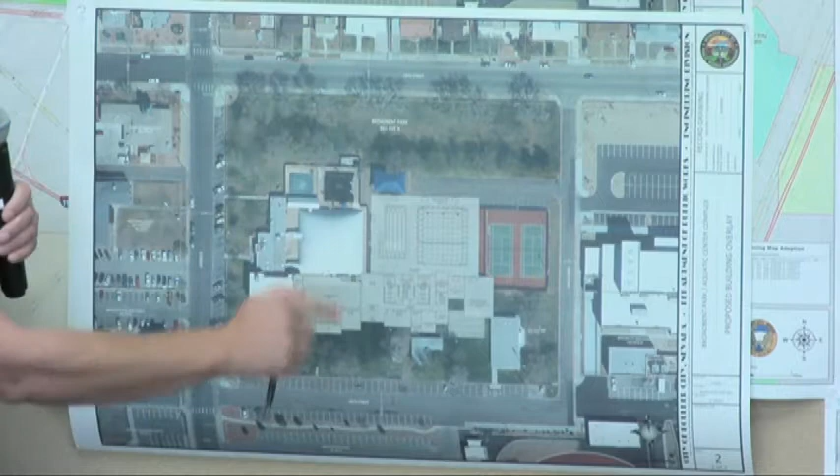All right, so the north is this way. And if we put doors, I'm thinking 2 on the south side, 2 on the north side. Then with the wind, we can open them up, because it's continually blowing. In the summer it's blowing this way, and in the winter it's blowing this way. If you go to Heritage, the air quality in there is really stagnant, you almost want to just stand outside, run in there, watch and come out. So this would help, especially when you're in there trying to breathe.

And the gated area, I was thinking if you put a gate, it could be part of that sun area for the parents, and I think it's a good idea. No, yeah, I see now. I was kind of putting it all together in my head, but I sometimes hate to assume that I know what's being said, only to later find out that I was assuming wrong. Yeah.

Any other questions or comments? A question I had is, when we look at what's commonly known as the Girl Scout building, do we know who owns that property? Is it the city? The property is owned by the city. However, in 1940, and I got a copy of the paper from the Boulder City News, the city made an agreement to let them use the property. The Girl Scouts built the building with volunteer help and operate the building on city property. Okay.

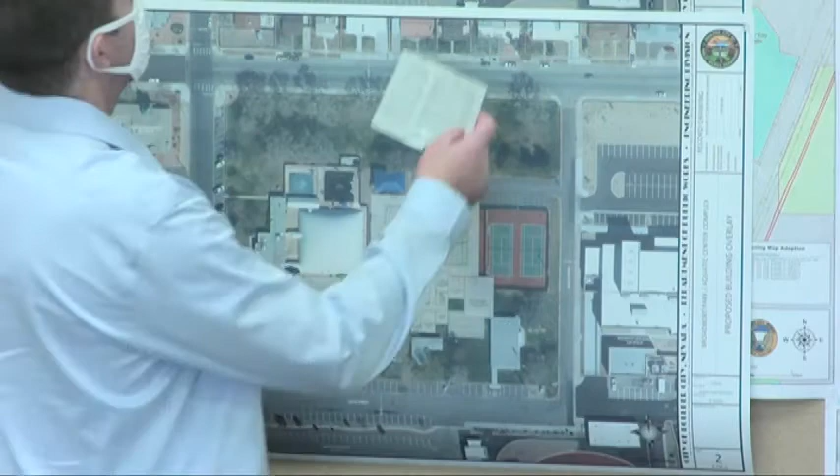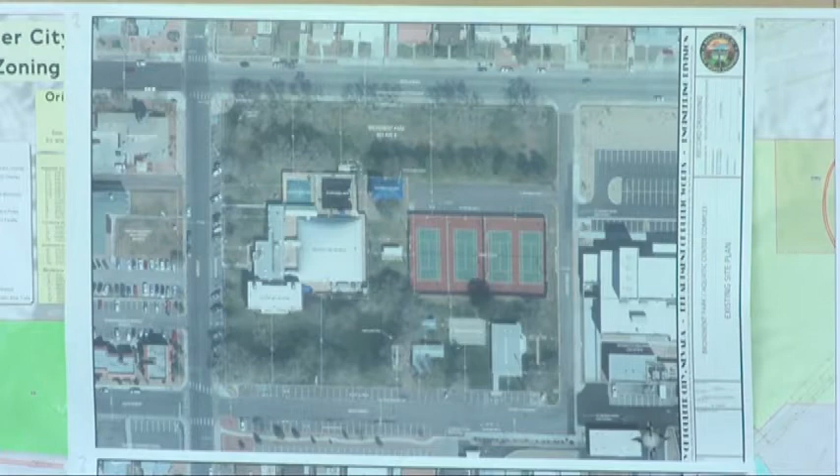Now, are you talking about... Your mic's not on. Sorry. You'll need your third hand for this. I'm not very good at multitasking. Are you talking... Yes, move that part of it.

The other thing, I realize we've got the 4 tennis courts there, and the way it's pictured right now, we lose 2 of those tennis courts. My idea is to try and preserve as much as we possibly can. What happens if we turn that pool, like that, and then slide it up? Now we're talking. Are we gonna try to retain the pool while we build the pool? Well, that was the initial discussion. If we don't, we were estimating, Mr. Luttrell, a minimum of 1 year, possibly longer, without a pool. I'm thinking at least 18 months, could be longer depending on construction.

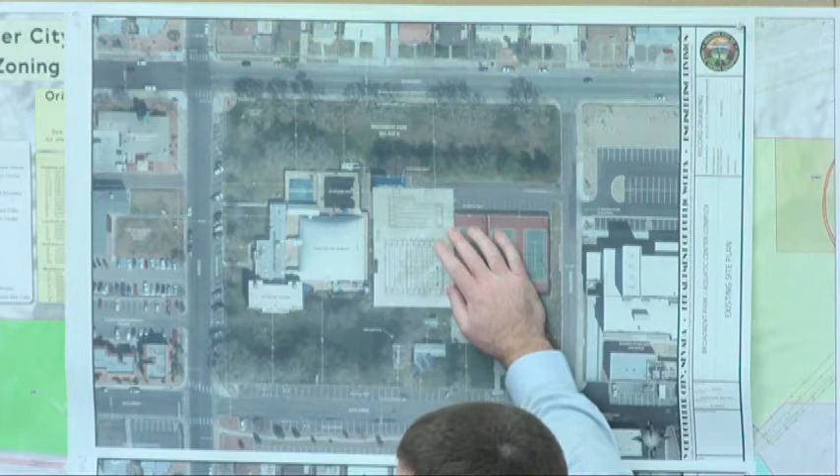What happens if you slide it up to the right over those old bathrooms there? Would we use the office and lobby of the existing pool while we build the pool, and once the pool's built, demo the rest and use trailers for a while? Yeah, if the decision is to keep the existing pool open, I'd see us using the whole facility as we're building the new one. That almost looks pretty good right there. If we put it in stages, build the pool first, demo the existing pool after the new one is open, then figure out how we connect the office to the racquetball, however we want to do it.

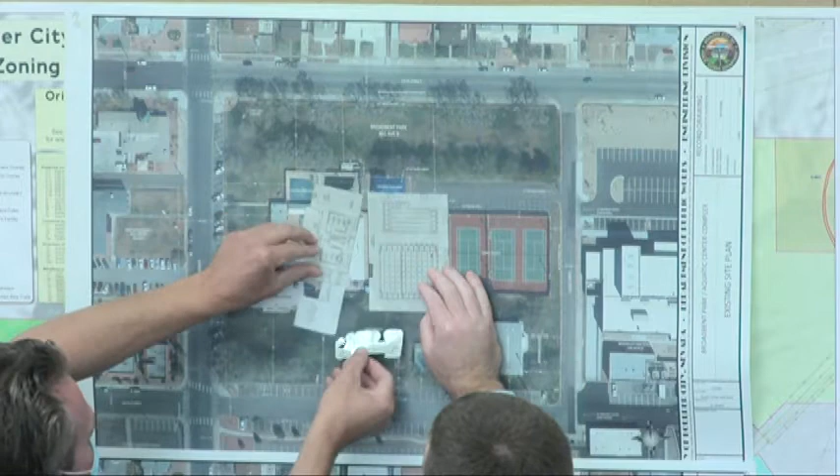That's the kid area, outdoor kid area. However we want to fit that in after the fact. I guess here being the idea that we would construct the pool portion of this first, and then once that part is complete, then that way we still have the pool available. Then we potentially move over to this other thing and adding that right there.

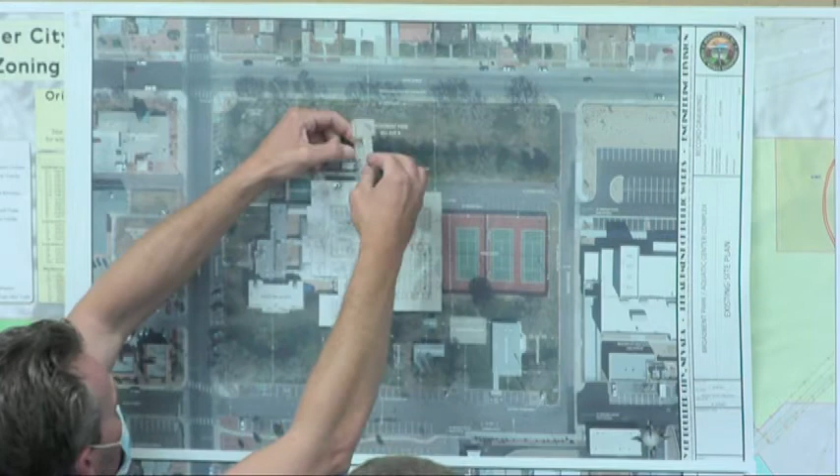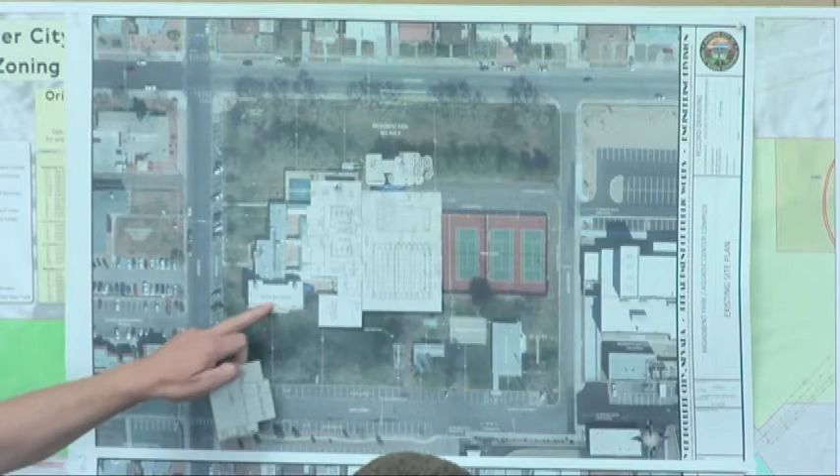It certainly does keep a lot more of the original footprint, which I think, you know, there's sentimental value to that. Yeah, we could definitely put it in the contract documents that this is to be phased. The existing pool, the whole facility is to remain open. They could build the new pool and then demo and then start the offices. Yeah, with that, you could almost retain the racquetball courts if you wanted to, or at the end, down the road, phase that in as those deteriorate.

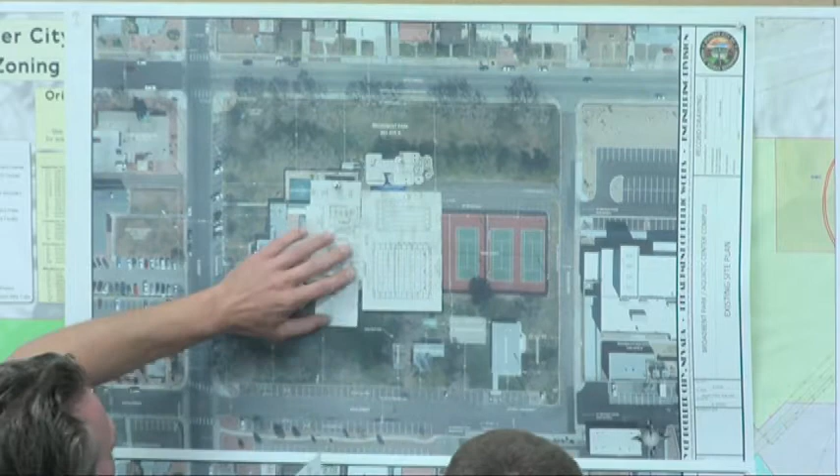Yeah, so if you did that pool first right here. Okay. Yeah, if you did the pool first, then yeah, I like it. I don't know, I'm just trying to come up here because I feel like we got to put our hands on it, you know? I do think. Sorry.

Yeah, I do think this is, I mean, like you said, before we go into the racquetball court and all that stuff is still there, and at least with a phased approach like this, I don't know what that does for cost, but it certainly allows for maximum flexibility so that we can retain as much use and amenities for our community in the interim while this progresses. Can you speak to that? If we were to do this in phases, inherently that probably stretches it out. How does that affect the cost and all that sort of stuff that goes into this?

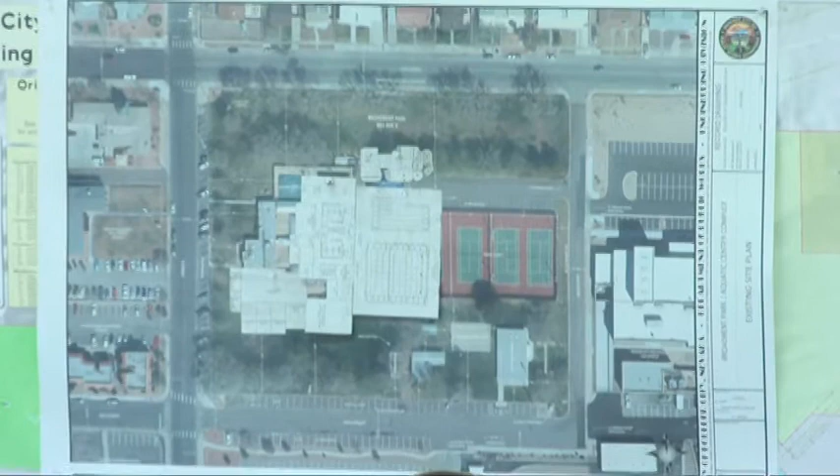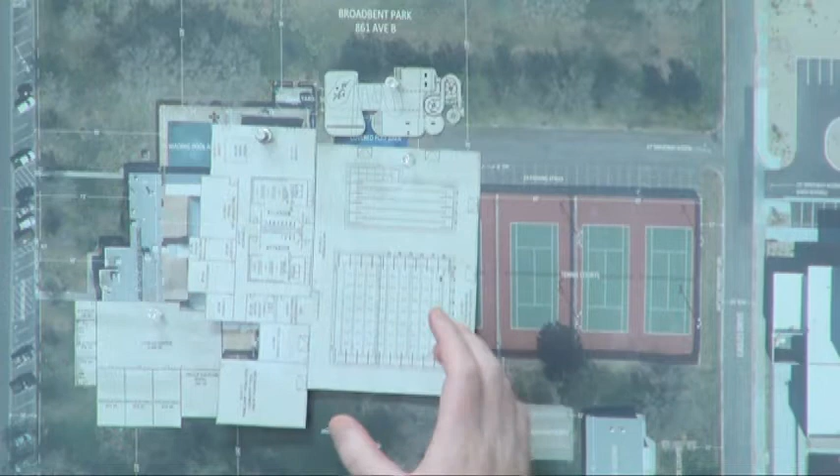There's two different ways to think of the phasing. One is it's the same contract, but the contractor comes in, builds the new pool, demos the existing, builds the offices. That would increase the price a little bit just because they couldn't just come in and knock everything out of the way and build.

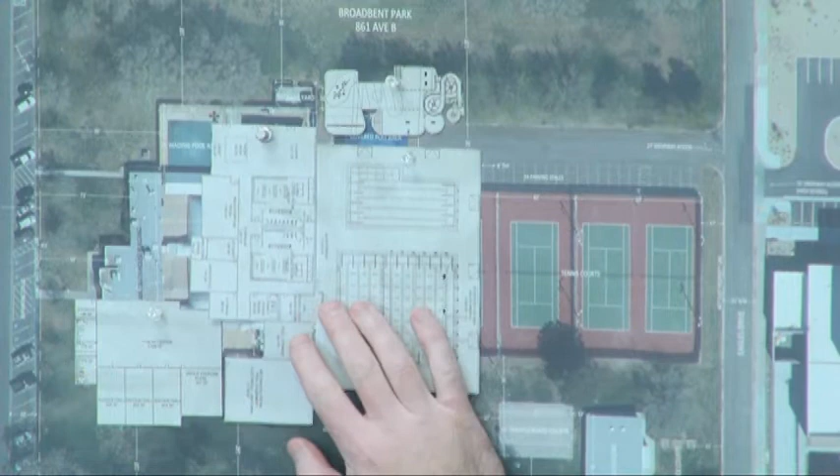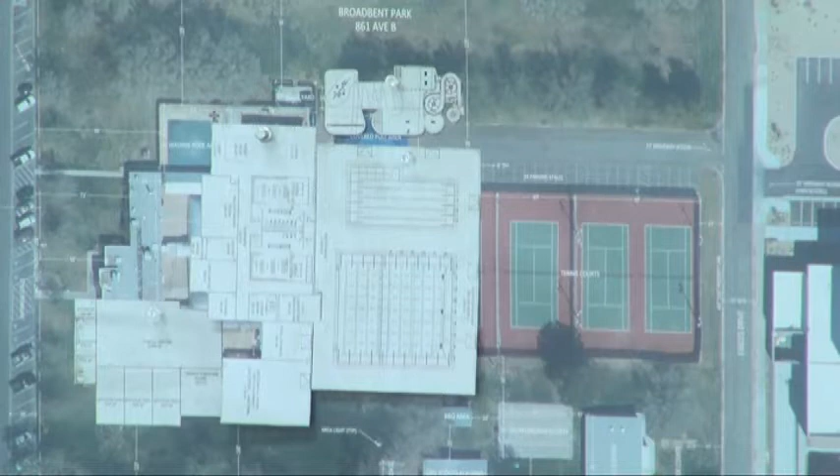But the other phase that I'm thinking of is do these two parts while leaving the existing, and then in 5-10 years we come back and build the fitness center and the racquetball after the fact, then that would be even more expensive. Partly just because costs go up, and partly because you'd pay new mobilization and a whole new contract instead of having it all grouped in one. So that's the two different phases I was thinking.

I do think, at least this one down here, we do still have some of the office space, some of the racquetball court, and then we also have included additional, it looks like fitness area, racquetball courts and stuff like that. So there's also the potential that, look, I'm not saying that great new facilities aren't appreciated, but we do still have these aspects and these amenities that the community can utilize, and should we come to the point where for whatever reason they've not been able to be maintained to the point that they can be used or are necessary, then we can address that issue.

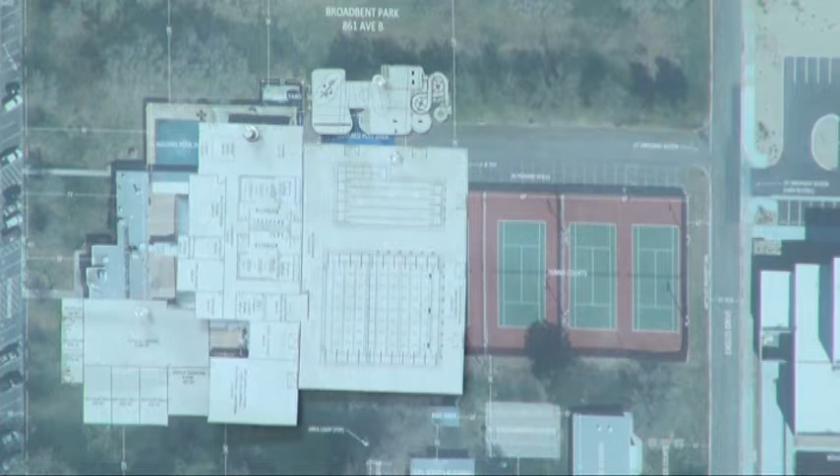But I'm still not entirely sold that we need to reimagine the racquetball courts and reimagine the fitness and all that. If we had a magic wand, obviously we'd have the best pool in the world, but we don't. So I do like the idea of the phasing, and I like the way this up here looks on the top as far as the layout goes, especially in maintaining closer to our original layout without interfering too much with some of the other things that already exist there. Just looking at this first suggestion, I think it looks good. I don't know if there's other suggestions that we might like more, but.

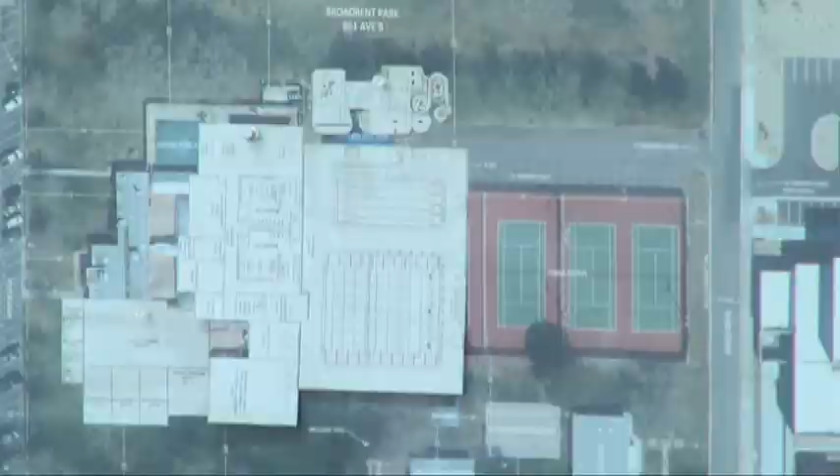I have a question. In this presentation you gave where it eliminated the two tennis courts, what was the plan for when the original pool goes away? Is that just going to be demoed and landscaped or something? Yeah, that was the original plan. We're trying to keep the same amount of greenscape as we have today. That isn't to say that when we demo the remainder portion, we can't put more tennis courts over there, or pickleball. I know that's becoming a big sport. Got it. Thank you. Yep.

Question 2. Go to this microphone. Yes, please. Okay. Is it working?

Now, you don't have the second tennis court blocked off on the upper model that you're manipulating. You only have... There'd just be one that was. Okay. Because I'm thinking if you want more green space, a lot of us want to continue to have the green space around Broadbent Park. And there are so many tennis courts in the school park. There are tennis courts all over this town. And if you moved it over one more, like you do in the bottom one, because you're showing 3 still existing.

And then it seems like with the demolition of the old one, again, we need to keep that pool going until the construction's done. And so I'm just thinking about how much park space you could have where the demolition is, if you don't keep building all this other extraneous stuff. I agree, it needs to be delayed until they have the finances, because we want the citizens to approve the ballot, and they want a pool with the priorities that you listed here. So I just was wondering how that was going to work.

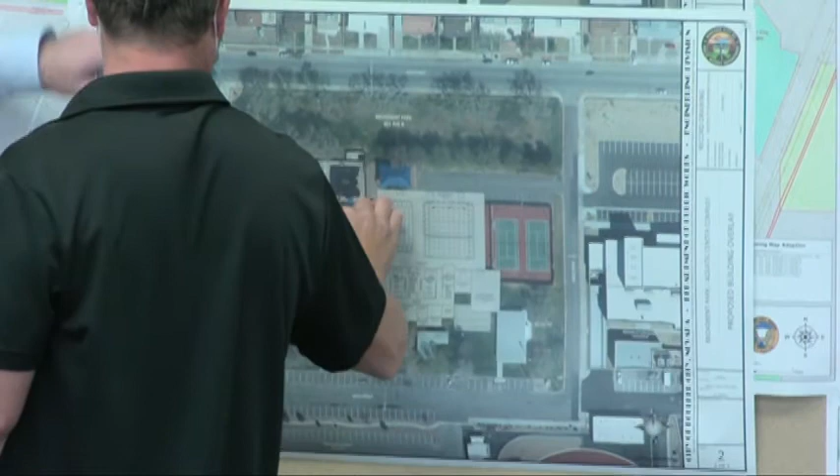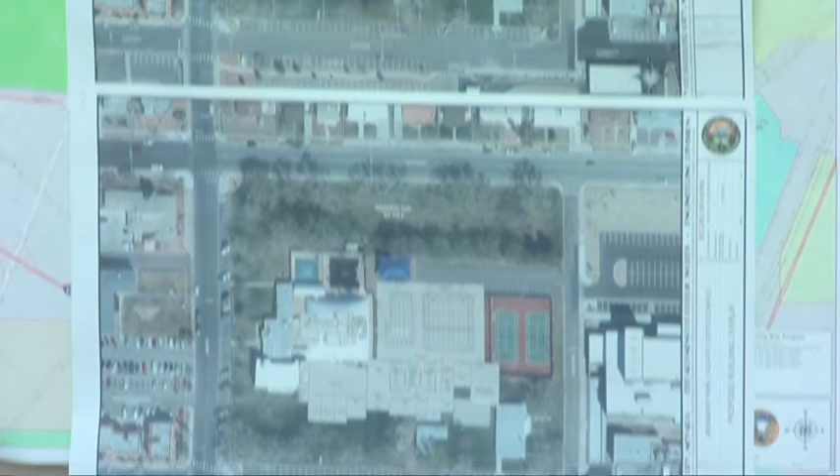Yeah, I wonder about going a one-way street, coming off 5th Street onto Eagle Drive, going south on Eagle Drive and then coming down 6th Street, if that was all one-way? Going to what the mayor's saying, I think we could make it one way, because there's an access way on the southern part. This would have to be two-way through here, but once you get to here, you could easily go one way out, or if you come up here, you have to turn left. Oh, you're talking about using the entrance at Bravo Field? Yeah, because those parking lots join there on the east side.

Mr. Hall, what do you think, when we start talking about softball games and football games? I think the biggest impact is the football games, because that parking lot is completely filled, plus they're using all the parking spaces on Eagle Drive on both sides, the south side and north side of the park. That fills completely up, so I would recommend keeping that road wide the way it is, because you have a lot of special events there, like when the kids design and put together their floats. There's a lot of things we use the wide street for.

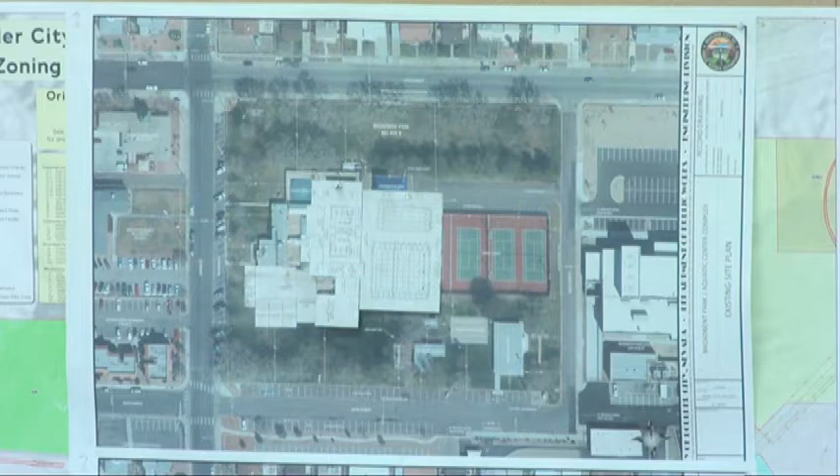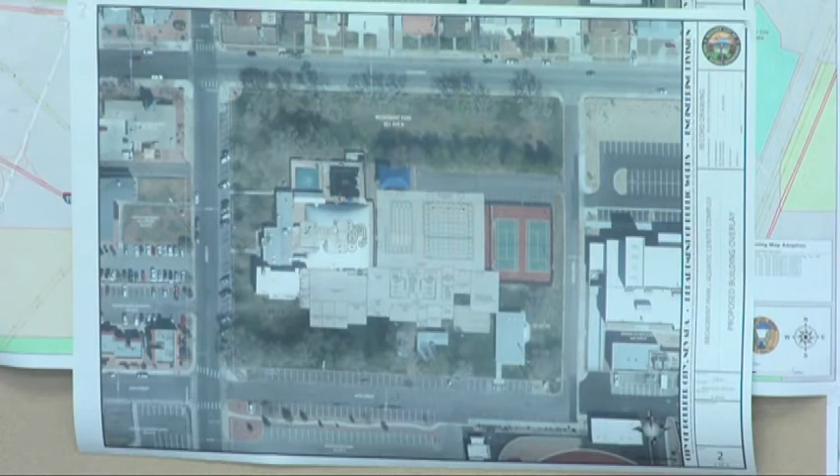It's the only opportunity we get to do it, so. Yeah, if we were to keep this layout, then once you demo that out, you could put the splash pad right there; it would come at the end.

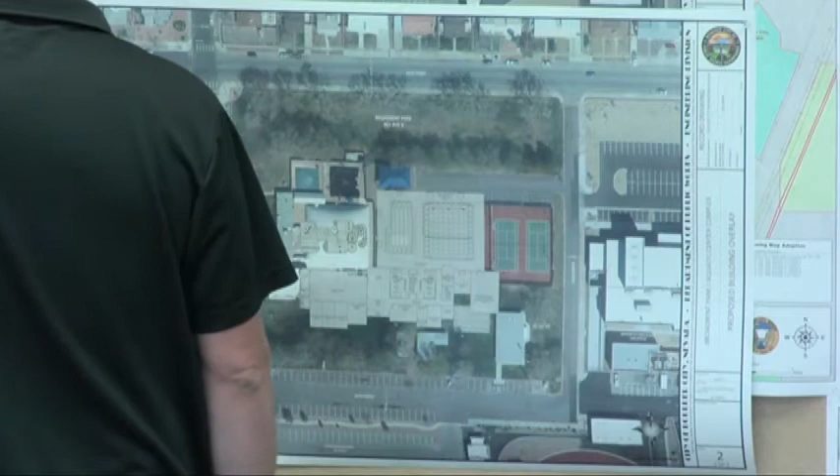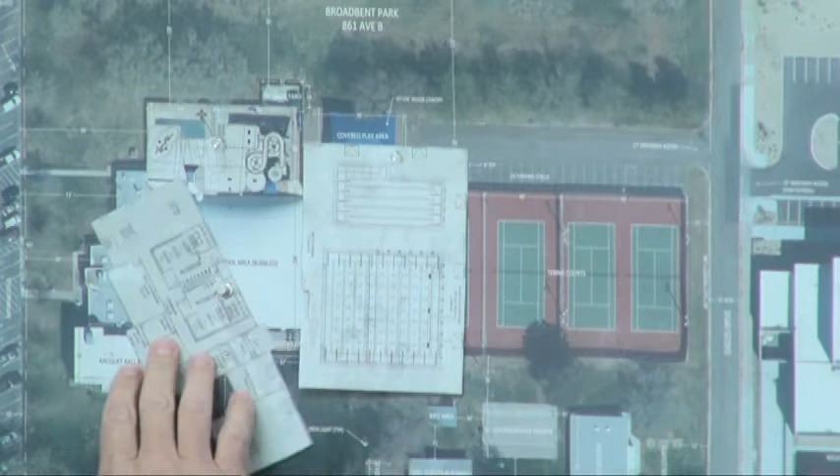Regarding the Girl Scout building, I'm sure if the city worked with them on developing, switching out some property or something at one of the parks, they might be able to do what they do at the Girl Scout building. They camp out there, they do a lot of things, they have a little kitchen in there. But that building was built in 1940, so it's really old and it's not in the very best of shape.

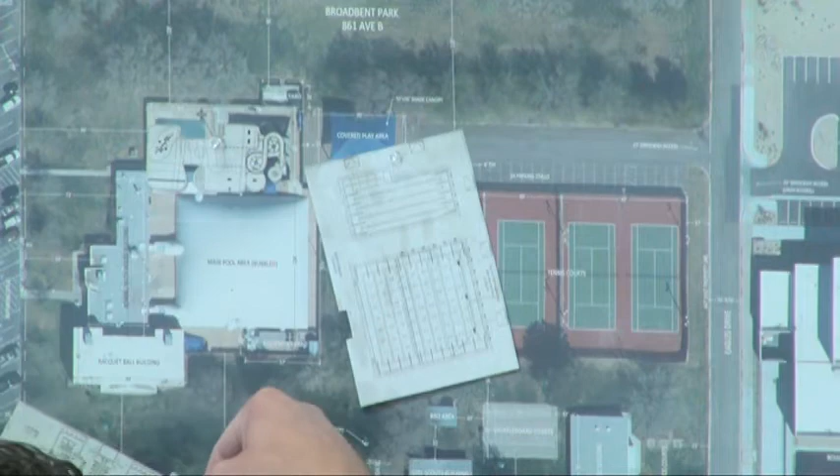So they might be able to think about moving or something like that. Yeah, and obviously we need their input on anything like this, but the building, as you say, it's been there for a very long time, but if we look at doing things, it just happens to be right there in the middle of that open space.

Is the multi-purpose building not available to them at the same amount of time that they use their own building, I wonder? I'm just not sure, do they have regular times that they use it, or is it irregular times that they use the building?

I believe, too, I don't believe they rent it out, but they have special occasions there, whether they're birthday parties for the troop or camping, where they camp out over the weekends. They bring the girls, they teach them how to camp out in the park right there.

They do let the Jamboree Committee use it for storage for the day, a couple days before the event, so we can stage out of there for that park.

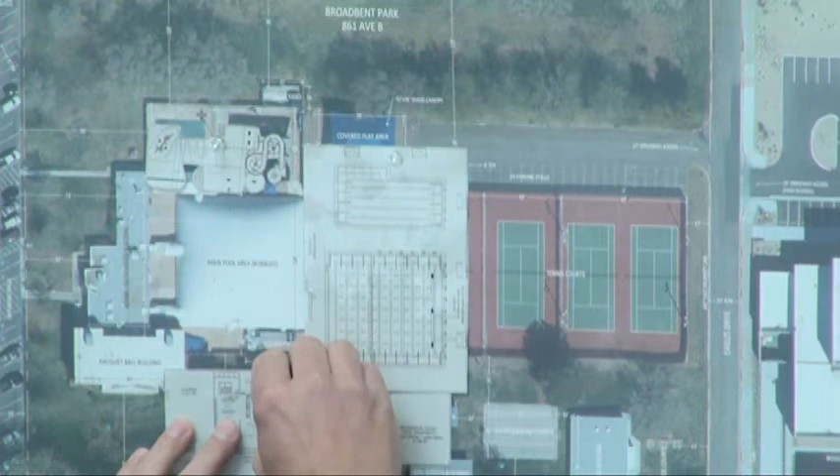But I still think that if we made some land available, or on the multi-use building, we rent that out quite a bit. I mean, it's not uncommon to go seven days a week with birthday parties, weddings, and a lot of activity in there, and we'd like to keep that revenue source going for the Parks and Rec Department. That's a pretty good moneymaker for us. So I'd hate to promise the Girl Scouts that they could use it and then.

Right, we don't want to do anything that would restrict their activities or put some parameters on what they have available to them, but that still leaves us with the question of what to do.

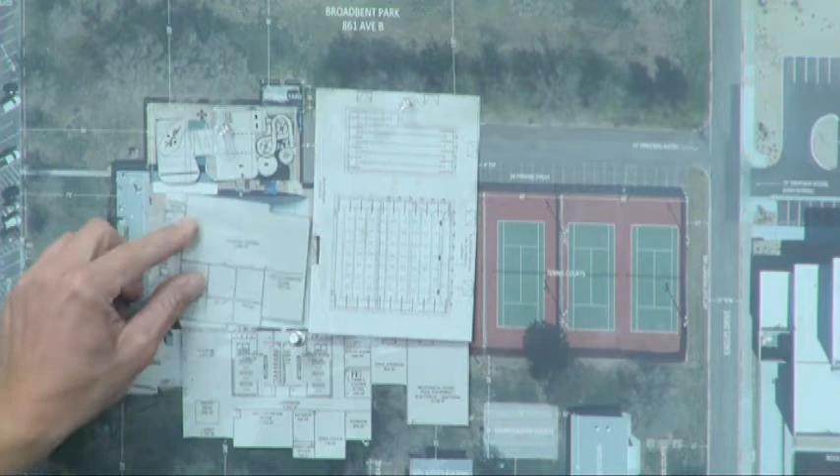On that note, when we're discussing the multi-purpose building that we have there and it has a kitchen and stuff like that, I still notice we have a kitchen in this, we have a multi-purpose room in this plan. What, do those serve a purpose beyond what we already have there? Is there such great demand that what does this kitchen provide that the kitchen doesn't necessarily provide in the multi-purpose room?

Well, as I said before, we rent that building out, so there's a lot of activity in that building. And then there's a distance between the multi-use building and where that facility would be. So the staff would have to go out if it's not rented, and they wouldn't have complete access to it because they'd have to work around how many times we reserve it.

And there's a distance between that place. If it was connected, I could say yes, we could get rid of the kitchen in the facility, but when I say kitchen, it's probably an area with a microwave, and it wouldn't be a regular kitchen like we have in the multi-use building.

That's what my question was, because I also do see a staff break room, but I don't know, I'll be honest, I don't know how these rooms are utilized individually. If that's not appropriate, in the lifeguard slash staff break room, to combine those elements of having the kitchen or the microwave and stuff like that available.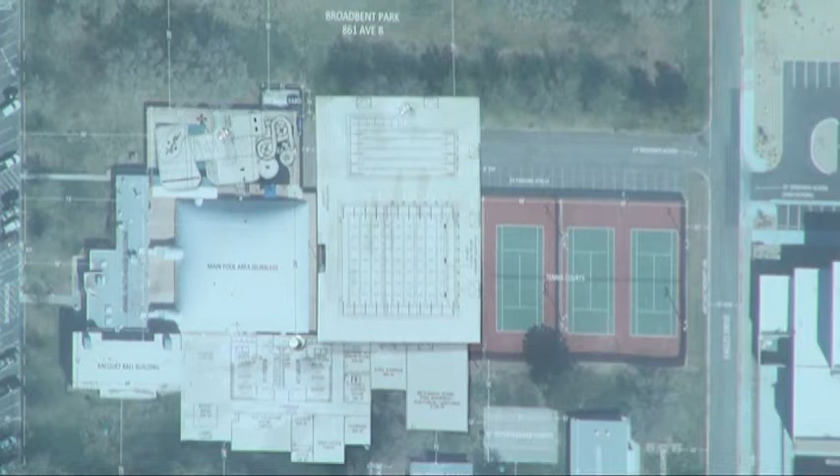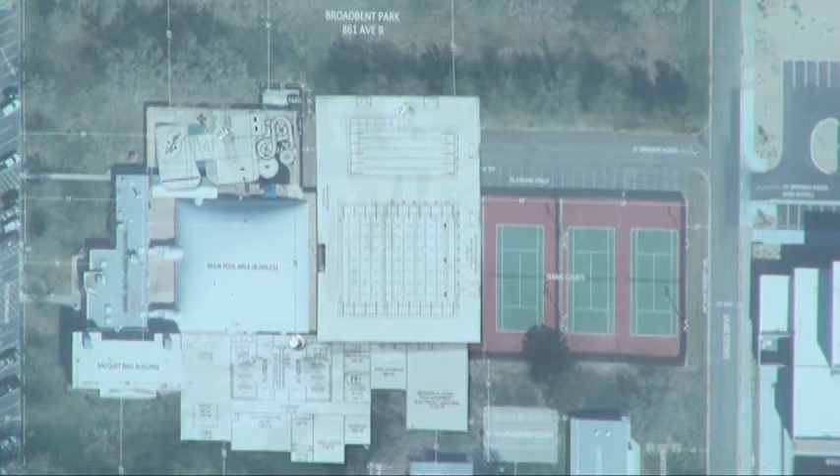When I went and talked to the people about the Murtha pool, you've got almost 3,000 square feet for a mechanical room, pool equipment, electrical, janitorial. The indications they gave me was they would normally not need anywhere near that amount of space for the pump and all that type of equipment. That's a very large room for that particular purpose.

And then we've got 1,300 square feet for the lounge, and then a multi-purpose room, an open office, a 700 square foot open office. There's a lot of room in there that maybe things could be changed or reconfigured.

Is there any consideration, for instance for the mechanical room, what type of considerations do we have to make sure these things are placed near each other? What do we need to keep together so we don't have something clear across the building that really needs to be near something here? What types of things do we need to know regarding that?

In the mechanical room, you have to filter the water, normally with 2 high-rate sand filters, depending on the 4-lane and the regular pool. The regular pool would have 2, and probably 1 for the 4-lane would be a separate filtration system. These are high-rate sand filters — the water goes through, is filtered, and pushed back out to the pool.

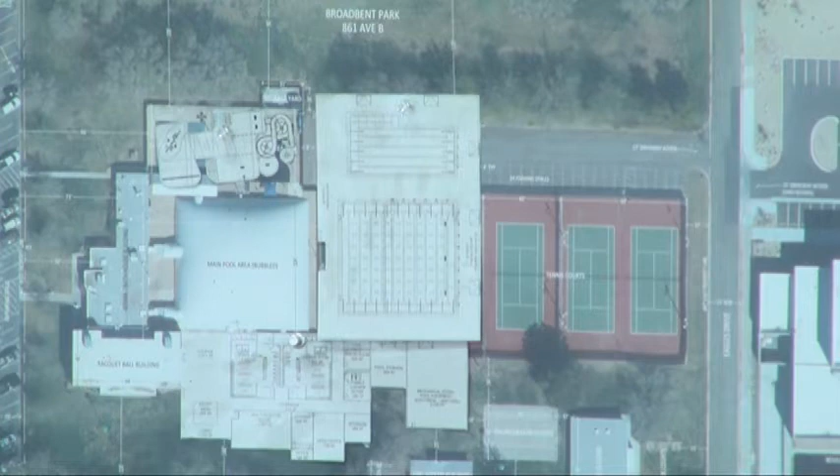You have your chlorination system in there too. You can put an ultraviolet light system, like most pools are doing now, or a Cal Hypo chlorination system. You probably have about three pumps on the main pool, because if one goes down you still need the capacity, plus probably 1 on the 4-lane. If you do the kiddie pool on the north end of the park, you'd probably need another one. So that's a total of about 5 pumps — 1 backup, then 2, 3, 4, 5.

And so the pumps take up an area. Then you have your chlorination and filtration system, which is the main function of the mechanical room. Then, depending on how they do the air conditioning systems for the building, they normally put that in there as well.

There's a lot. Then there's the storage area — you have to have a separate chemical room as per the health department. If we go with Cal Hypo, a liquid chlorine, we'd have a big 500-gallon drum that they fill up, used instead of gas chlorine. So you have to have that area too. That's why mechanical rooms now are so much bigger than when they were designed 20, 30 years ago.

Right, my question is more — because right now the pools are separate from the mechanical room — theoretically I could move one piece all the way over here, and suddenly the mechanical room's on the completely opposite corner from where the pool is. What I'm saying is we want that mechanical room right next to the pool, correct? Yes, we do. So I guess my question was what types of rooms or spaces need to be next to each other.

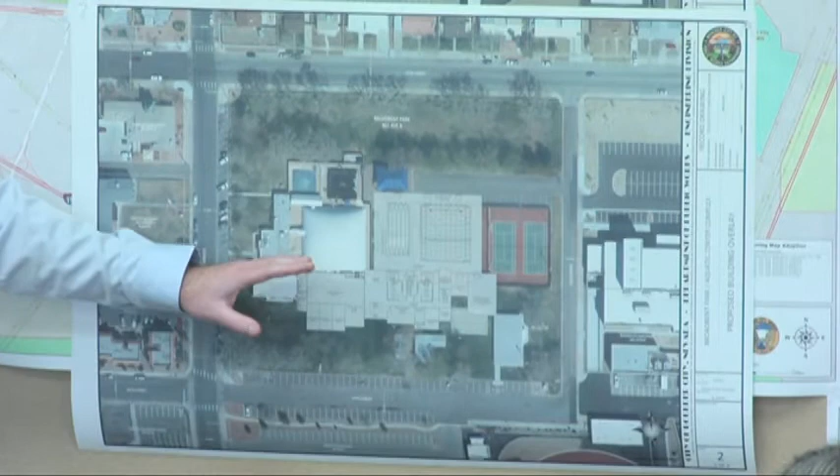Yep, it's on the diagram. This bottom view here was the final conceptual plan, so I just started with that. I got markers up here that I was going to cross stuff off and put a check mark by stuff we really like, along with the list that was in the packet.

But the point I'm trying to make is right now we're trying to fit essentially two things on here: the possible build out of this over some period of time and the old pool structure, but we know the old pool structure will go away. So I guess what I'm saying is we're reserving more land than will actually ever be used on this.

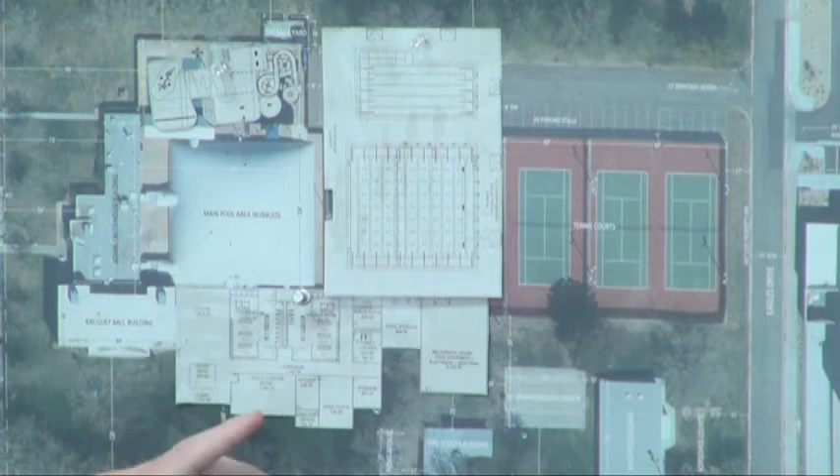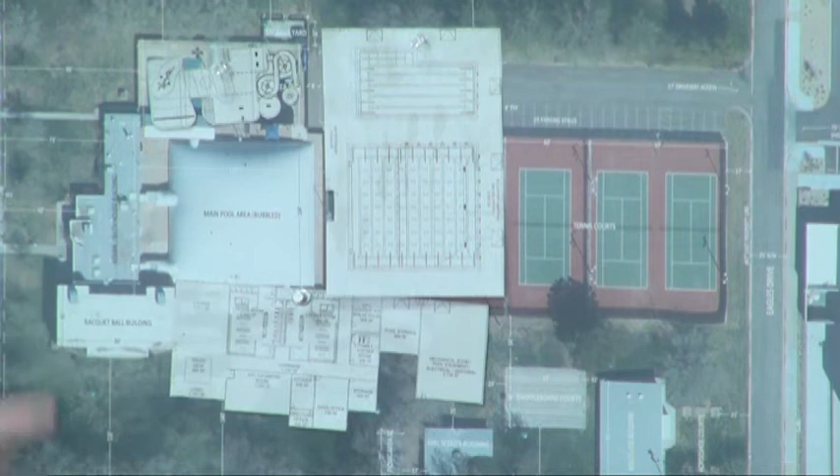If we were to go with something similar to the layout we have here, maybe moving the mechanical up and the pool down, it's quite possible that we could tie on to the existing racquetball. There's some unknowns in that, just because we don't know what we're going to get into when you start opening up walls. But you could keep the racquetball, and then you have whatever portions of this office, multi-purpose, whatever we want to keep of that, and then in the future, once we get the pool built, removing the pool and the office, right there where you're holding the pool and office, that's where you could do that.

Mom's and dad's layout area. It'd be real cheap, and it would fill that in, and we'd go down there and suntan and all, and let everybody have fun. You have to bring your own chaise lounge with you. But it would be cheap, and it'd be easy, and it would look beautiful.

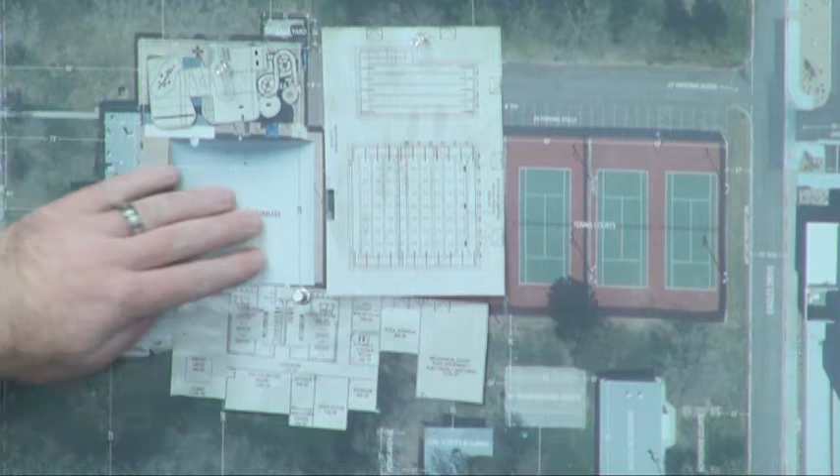Yep, it'd look fun. Yeah, inviting. This could all be grass area in the future. Run a fence right across there, and boom. Lay your beach chair out. It'd be neat.

With this right now, how it is, would that be able, do you think, to more or less be essentially one phase, this kind of thing? Obviously, I don't think the splash pad is necessarily in there, and I know we're kind of thinking about future what can be there, but with just the pool and this office area, how it is right there, could that more or less be in one phase so we're not really phasing it out and we can maybe save some money that way?

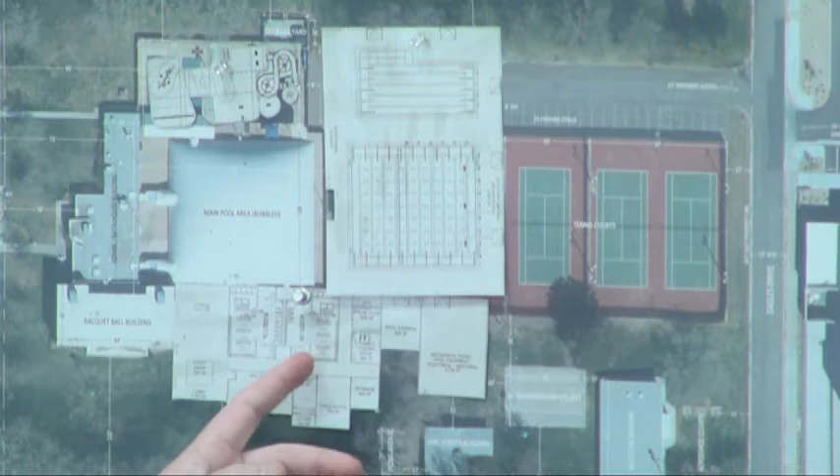Yeah, it would be the first phase I was talking about, where we construct the new pool and then demo the old pool, just so we're open year round. But yeah, they could construct the new pool and start doing the office and whatever we want down here at the same time, and then in the future, at the end of the contract. It's not really phasing—it'd be we'd bring one contract to council for approval, and it'd be to do all that, but we'd have them certain steps what order they have to do it in.

Right, and this is just my personal preference. I did like it when we did have this other thing where we basically just took what we have right here and rotated it so that we would be going over, basically like that. I know that might be a little costly, having to do it in those phases, but that's just my personal preference. I think it would then keep a little bit more closer to the original layout.

I do know there is some concern about accessibility, but I think with that parking lane there, we might be able to—could that potentially be used to help create access from that point? Are you talking about above where the tennis courts are? Is that something that's potential, if we're talking about access, so that people aren't having to walk clear across the park, so people have easier access?

Well, you'd have to put it right where the offices are, because you have to have a staff member there to check people in and make sure they pay and that type of thing. So the office needs to be where you're going to have people walk in. The entrance. Okay, gotcha. Okay.

Yeah, that little lane there that comes in by the tennis courts, it's very limited, and it'd be very congested. Yeah, it just a thought through my head when talking about accessibility. I want to make sure that we provide for that much.

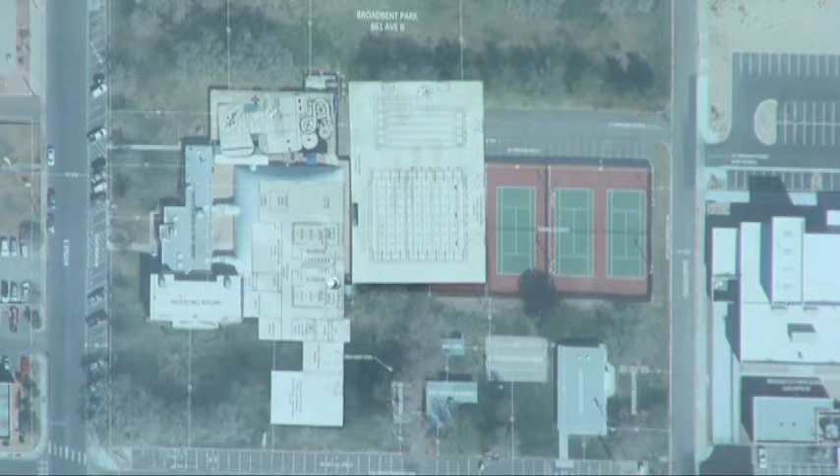Are we gonna take a picture of any of these layouts to show the architect, or however that works? Yep, definitely. It'll give me a couple starting points, and then we can always, if the committee's still here, we'll share those, and it just helps narrow down how they're starting. It's really expensive when you ask them to start coming up with their 5 different ideas.

Well, and they don't know what the 4th of July is all about either, so, no, we'll have to have them come out. When we say that lower left-hand corner needs to be left open, they're not going to get that, but... no.

Well, I don't know. Do we confuse you, or do we? No, I think this is helpful. I've got a question. This is beautiful and it looks like everything that everybody wants. Is this very similar to what we asked the first time we went out for a design?

Because I'm thinking if we do this, and the questions that Kieran's asking about square footage and the sizes and all that, it's going to come in as expensive as the first thing we got. Yeah, this bottom view here is exactly what they called the community preferred option. That was 33 million plus construction management, everything on top of that, and that's what brought it up real close to that 40 million.

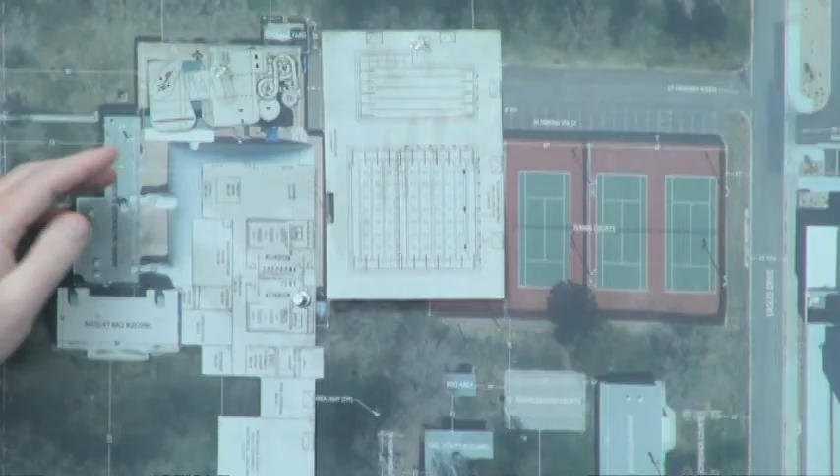From all of our discussions and us removing bits and pieces, maybe consolidating different portions of it, that's only going to bring the price down. Yeah. So when you go out to ask for the design and cost, it's going to be a little bit smaller than what we originally asked for? Yeah, if we're not looking at doing the racquetball fitness center area right now, and then we also say we don't need a lounge that big, and we're not sure we want to do the kiddie area right now. We need less office space.

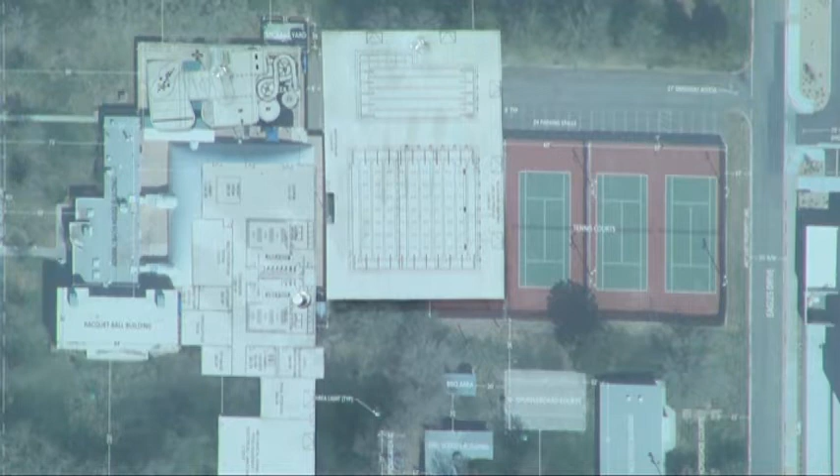Okay, so we'll ask to do this in phases. Phases for the design, is that what you mean? No, for the racquetball courts and all that. I mean, they can give us a price for just the pool and then give us a price for the racquetball courts and the office space and all the other things that we need. They'd be able to get us an estimate.

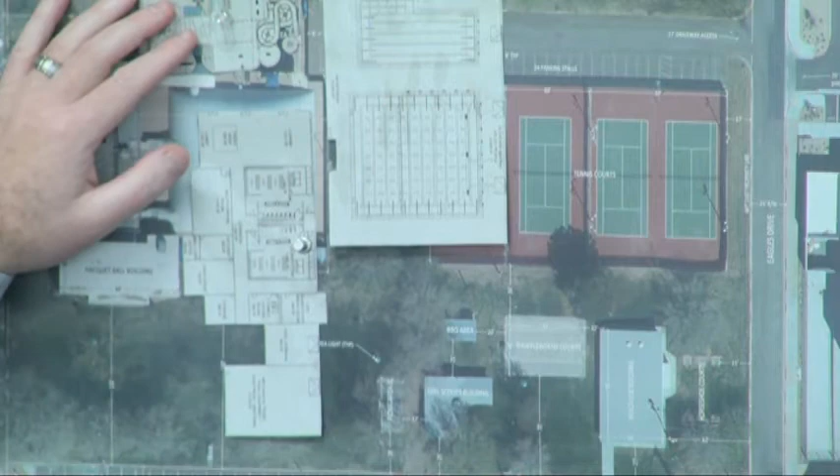If we wanted to do the office, kitchen, multi-use, the pool, the mechanical room, if that's all we wanted to construct right now, they could just start the design on that, but they could also give us a rough estimate on, okay, 5 years down the road, we want to add the kiddie area, and 10 years, we want to add the fitness center and racquetball. They could give us an estimate for those, but once they start design, they can give us a lot more firm numbers. Okay, so it's not doing all of it at one time. Yeah. Okay.

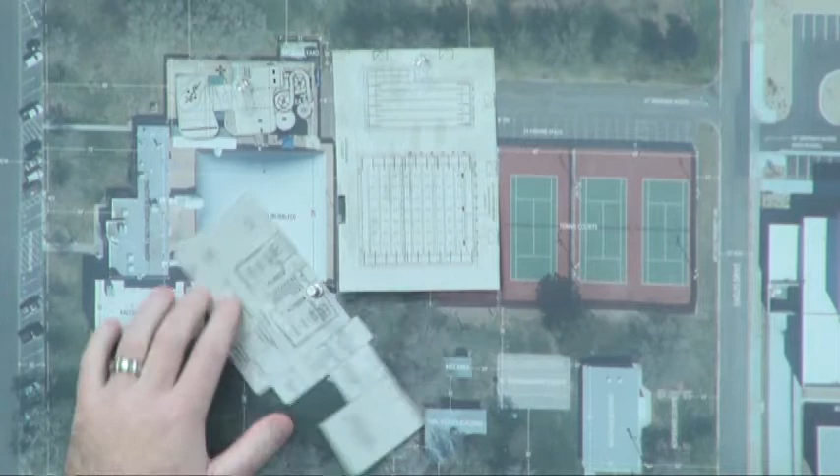Anyone else have any comments or suggestions? I just want to know, based on Mr. Briel's comments, what would we be asking the public to approve? That's a good question. And again, this is a difficult situation. I mean, we're not pool builders, but by including the elements that we've decided, or at least have discussed not including, I'm not sure we're getting to where we need to be if we keep these elements in here.

We do need to, I believe, do this in a way where, 10 years from now, if it's a decision to do a weight room or a multi-purpose room or something like that, the design that we decide on doesn't say, well, we can't do that because they didn't think ahead 10 years ago. So we need to have this stuff in here, but I think the visuals are not helping us because we know the old pool structure is going to go away, which opens up more land, and we've got elements in here that we've decided make the project too expensive. So that's not helpful, I understand that.

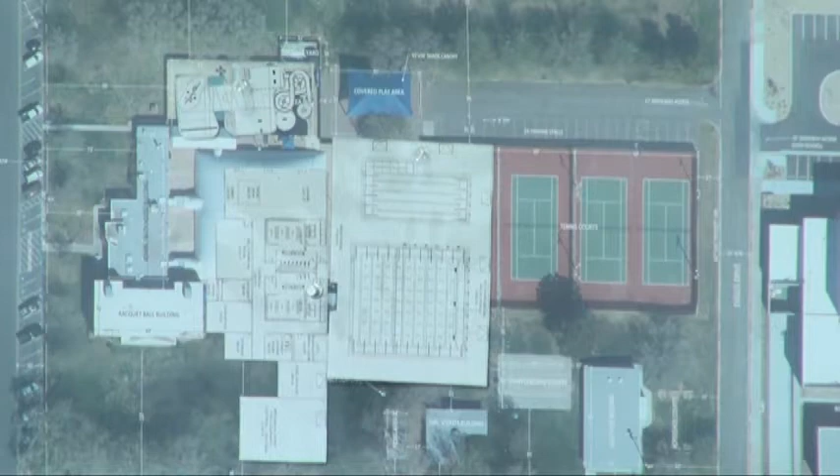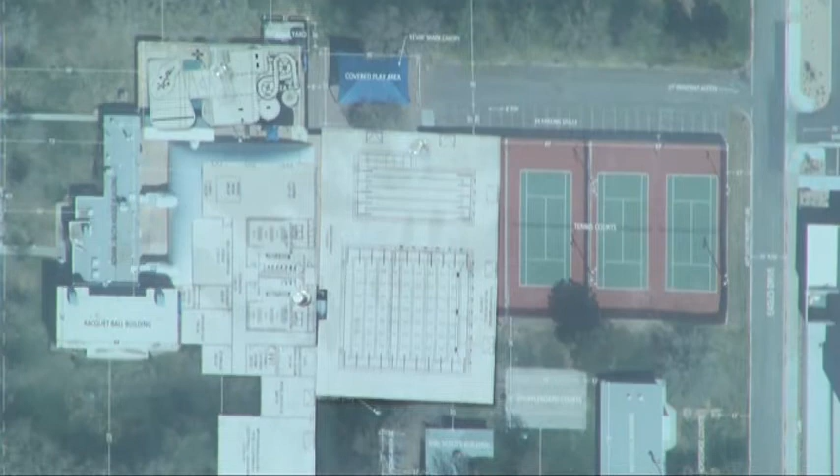No, I don't believe we have the CAD version of this, but I think we could come up with something internally, removing the items that we've talked about, shifting around a couple different ways we had talked about it. I'm not very good with Photoshop, but I'm sure somebody can figure out how to at least blur out the existing stuff so we can see what the future pool would look like once everything's been removed. We might have to get creative because it's just an aerial image and it'd be tough to remove the existing stuff, but hopefully somebody's a lot better at Photoshop than I am.

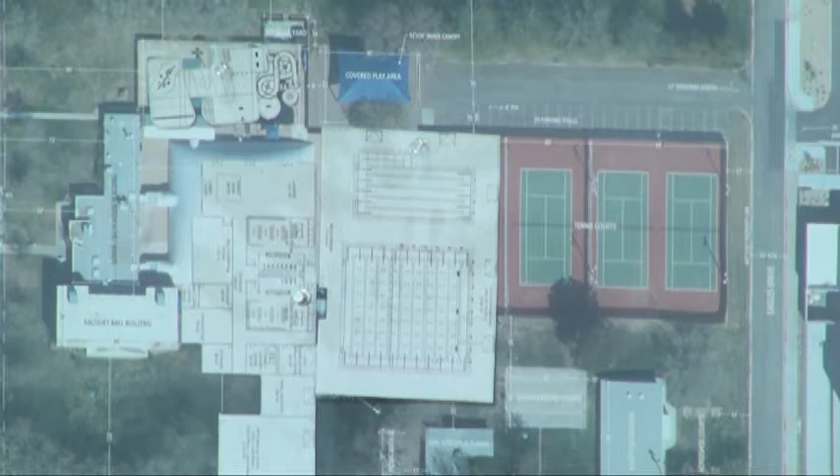Well, and again, I think we need to look at that list on page 23 of the packet that identifies which elements we have discussed including, and somehow separate out these other things that we're not looking at right now so that we do get a better idea of what we are, can it be built where we want it to be built?

Just a comment, we don't have page numbers on our packets. I don't. Yeah, I see, but I don't know the page number you refer to. It's the one after the picture. No page. We're looking at the list.

So, well, I guess at this point we have to do something with this item. It does appear that there's enough room. We don't know exactly how it would be laid out, but it appears there's enough room to do all of the elements, not right now, but at some point in the future. The space exists to do it. I think that's correct. That's a correct statement. And still not get into areas of the park that we want to leave open.

I think S&H did a comparison in doing the new facility, comparing it with the green space that we have existing right now. After the new facility was put in there, it would be the same green space that we have for Broadbent Park. And that's what we wanted. We didn't want to cut down the green space and put facilities in the beautiful park down there.

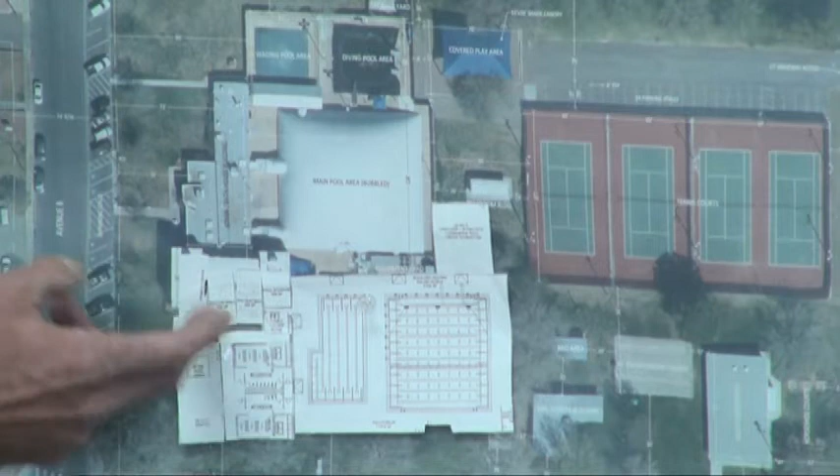The racquetball courts would stay, and you could have one of the racquetball courts as the pool storage, one as a fitness center, and two of them as racquetball courts, and just keep this main building over here, the entrance we have now. There's at least one bathroom over there, could be two bathrooms, and that could be for the employees where they could sit, for their break room.

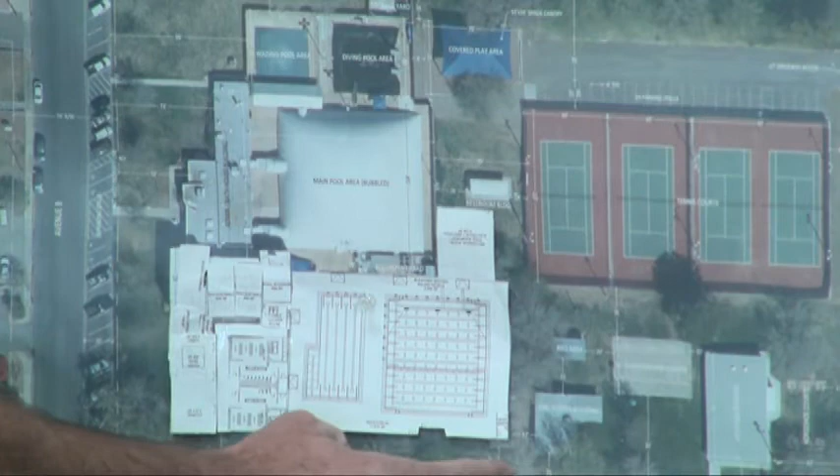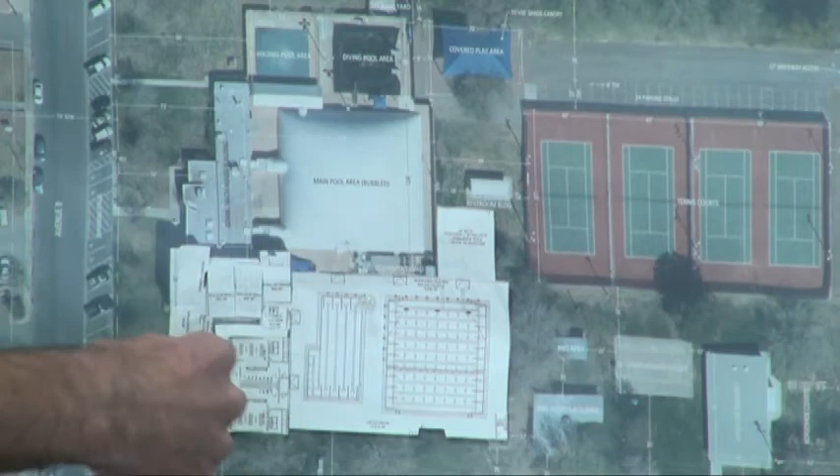Having the pool right here, there could be some kind of decorative fence that would come along here and the back side so that you can have access to these, with shade structures that were solar, or you can put solar basically anywhere, with the mechanical room right there. And so it wouldn't disturb anything in the park. And when you demoed the rest of this, it would basically keep a little courtyard here in the middle.

It does jam it against that side, and once again, these are crude drawings. I did them with my guy, and then we just kind of stopped. But I don't know if you could see this. The corner of the building would be similar to the hotel as it goes through, and then as it goes back, it kind of goes to where the racquetball court is, and since that would be existing, you could actually clad something to the side of that to emulate the structure here, like when you drive into Boulder City.

So this would kind of be the front. And then the side of the racquetball court could look something like this. It could look exactly like that. Going back, it could be carved out of anything. And then where the existing office is right here, we'd actually make it look like, say, the theater. And so some of these drawings represent it. Like I say, everything is way more crude than I would like it to be.

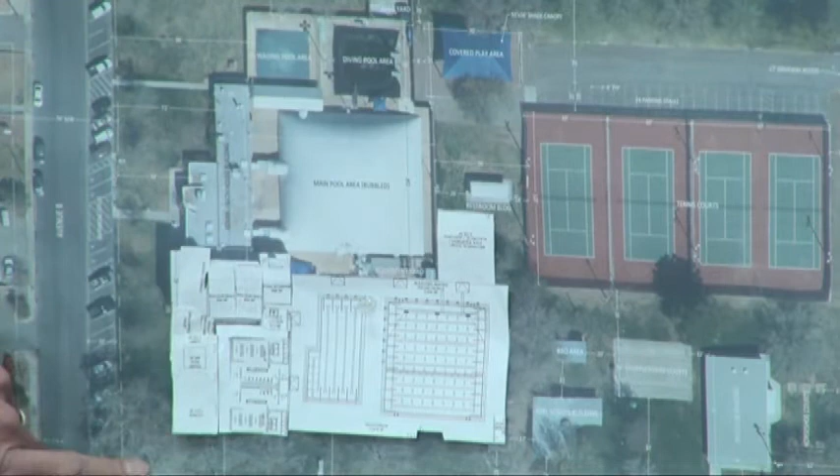Chad, I have a question. Down on the corner then, is that where the entrance where they would pay? Correct, yeah. Okay. It can be down here on the corner. And right now, we drew it would have a little pathway going down both of the sides with a little fence, so that if you parked here, you would know that's not the entrance anymore. A little sidewalk that goes down, and then a little courtyard in the front. We've got it pictured as a sphere with water coming out of it, but that was the very first thing. I mean, we could have like a Hoover Dam that's uptown, something like that, with water below it, or anything,

or just good planting. So you're trying to do the Art Deco look for the dam and stuff in the hotel. Is that what you're trying to go for here? Correct. Okay. Yeah, and using some of the existing building, and it would almost be the historical part in the front, and modern in the back with the pool. If you left it with the glass and all the high tech, or I've seen these where you don't have to have the glass. You could put some kind of covering over the outside so it doesn't look modern, and it can be incorporated into the historical part.

I think the big thing that I did see when I went to a couple pools, at least I saw the outside, and they all kind of look the same. It's block walls, with the name of whatever town it was or division posted on the outside of it. Something a little different.

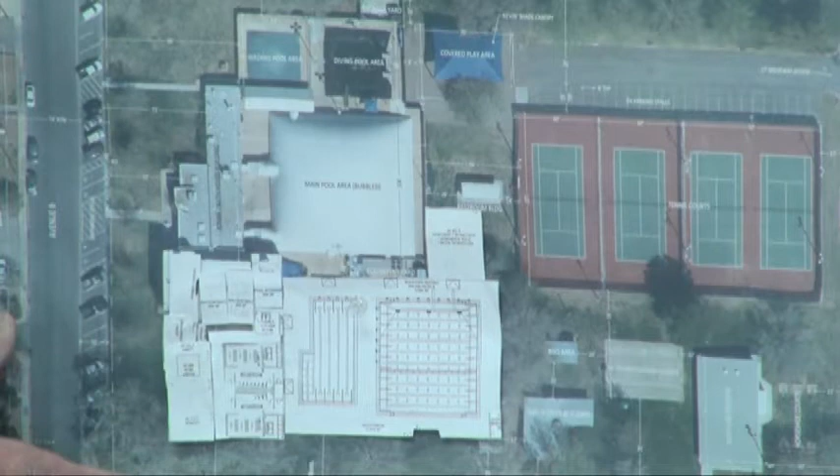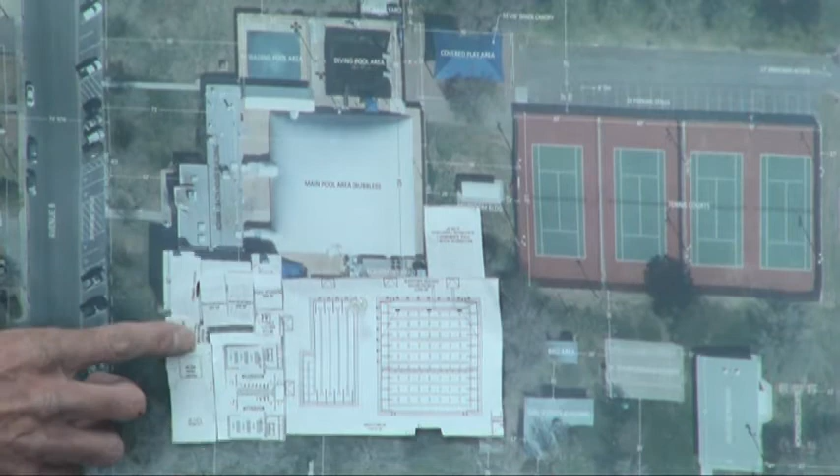That area that you have in the lower right-hand or left-hand corner there, that incorporates the offices and the other things that we've talked about? Yeah. The lobby, there's the big lounge area right here, and then there's an open office right behind it. And most of them, I was able to keep the same dimensions as original. Roger, I'm sorry, your office got a little smaller. And the lifeguard stand a little smaller, or it could be extended. And then again, some of the pool storage and fitness center is incorporated into the two racquetball courts that are existing, and the employee break room would be back basically where the office is now.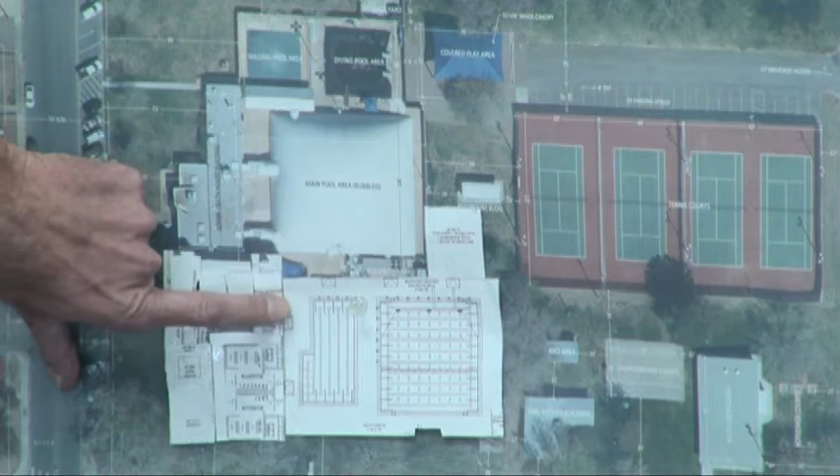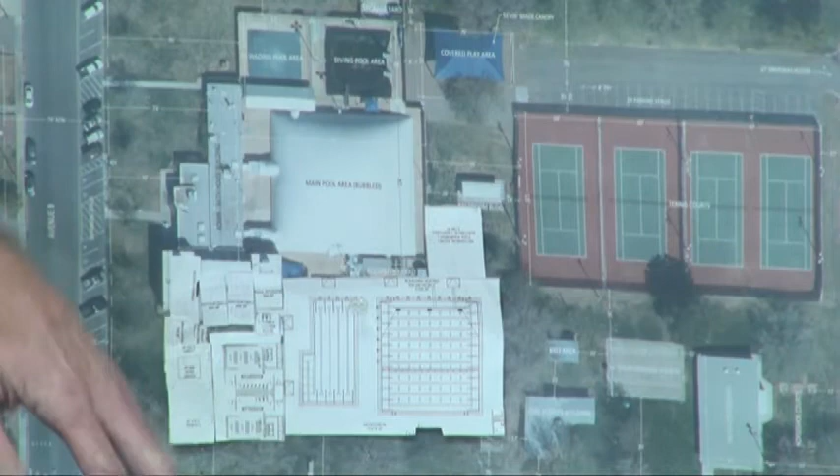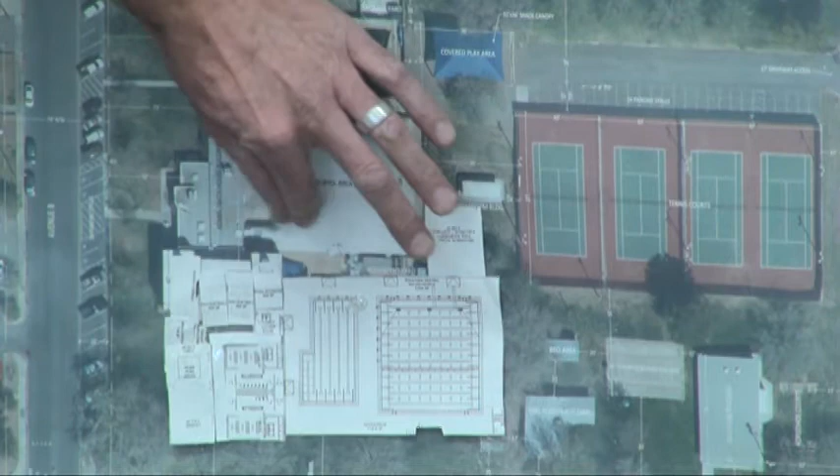And then the existing pool structure, when the new facility is built, the existing structure goes away. That's correct. Everything would go around it. There would just need to be, and it's not on here, but basically there'd be a wheelchair ramp up here and some type of way to get in behind the racquetball courts. It may have to be a little hallway or something, but that can all be on the CAD drawings. And then when this is complete, basically this is the buildings, everything else can be taken out.

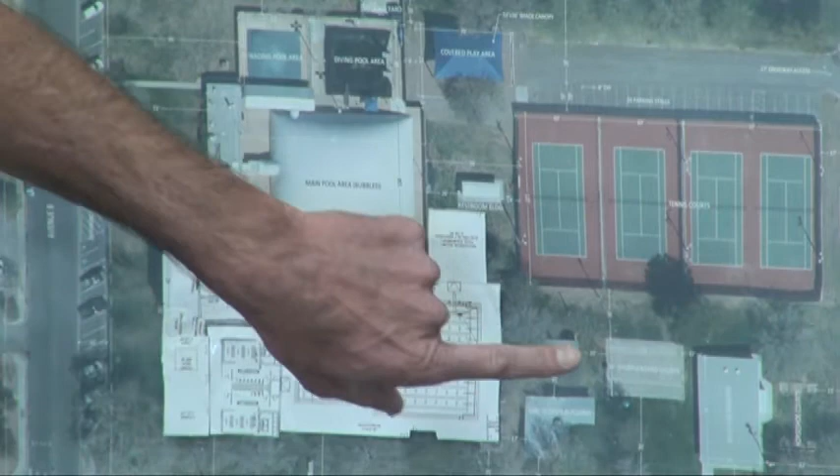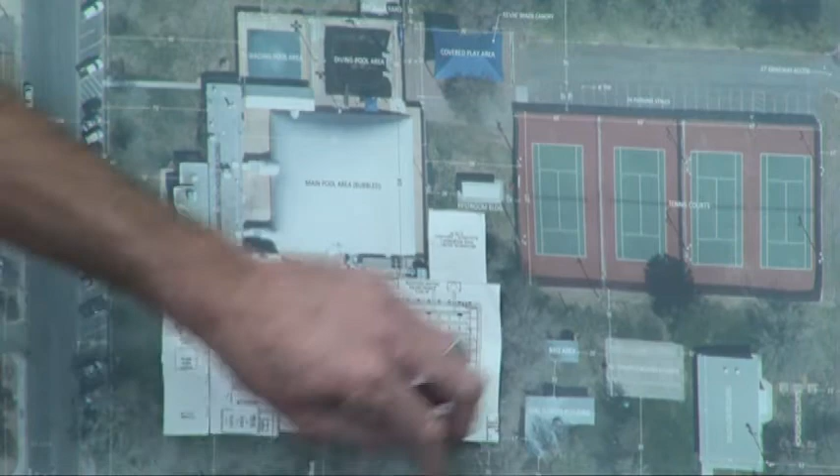If it needed to have more space, if it's worked out with the Girl Scouts, then there would be room to extend the building. You weren't here when we were discussing perhaps making an agreement with the Girl Scouts about their building, but that comes really close to it, right? That's probably, I don't know, 15 feet from the outside. We kind of left this setback at 20 feet. This actually needs to be moved in, I think, to get to where the corner is, but 15, 20 feet maybe to the Girl Scouts would be max.

I do think it's nice in the sense that it does incorporate, you weren't here for the conversation, but we did have a conversation about how we can incorporate some of the existing facilities already. And I think that is part of it, because it's kind of two different exercises. One, making sure we have enough space for everything as we look forward into the future, but also what does it need to look like now? And so I think this definitely helps give a little bit better of a visual on what that might look like as well. So I appreciate the work.

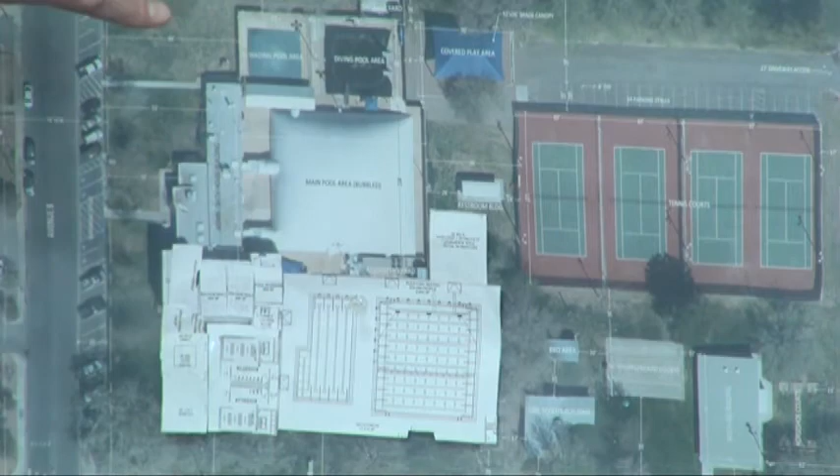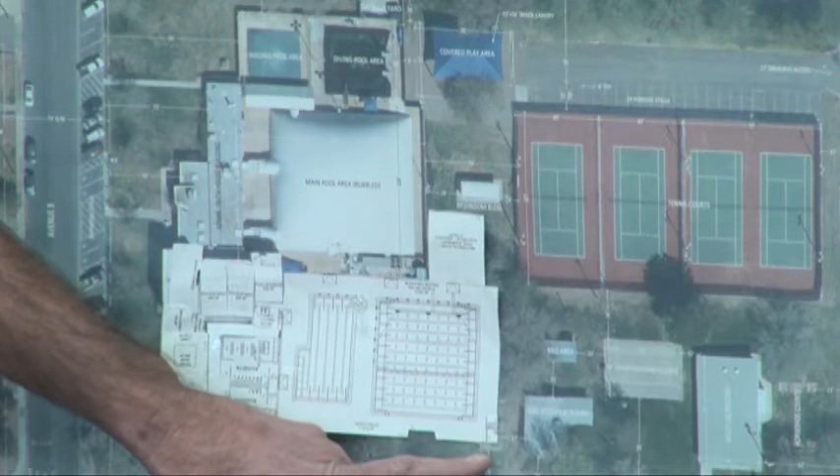Thank you. Yeah, it almost creates a big area back here, and this is where the pool, everybody could go later on, and you could have windows from this office. You would have access at multiple points to get to it. The configuration that you have there, can you point out where you would have the lifeguard room? It's right here on this corner. I think it's about 237 square feet or something like that. And if it needed to be extended, it could be longer, or it could even be right here in the corner, kind of an L-shaped office.

I just know that's one of the things, Cherie, that has been talked about, that you need communications with them and they need a visual out to the pool so that they can keep an eye on things. I just recall that as being one of the critical things that we had talked about before. Yep, more of a glass box, I guess. Anyone else?

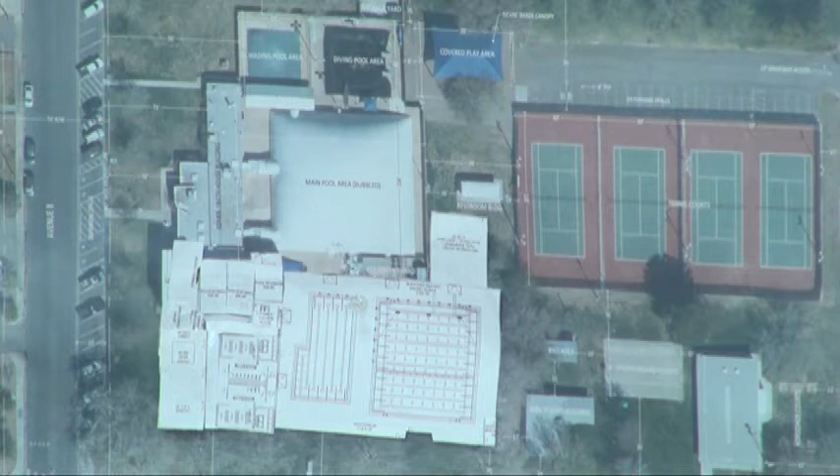Well, I don't know about architects and design and stuff, but I like the fact that it's more compact, what I'm seeing here. It's not so spread out, and then you have that whole green area where the old pool would be to do different things with, when they demolish the old pool and so forth. And it looks like it's closer to 6th Street here too in terms of access. So there seem to be some advantages, and I like the fact that it's more compact and maybe more cost efficient. Thank you. Welcome.

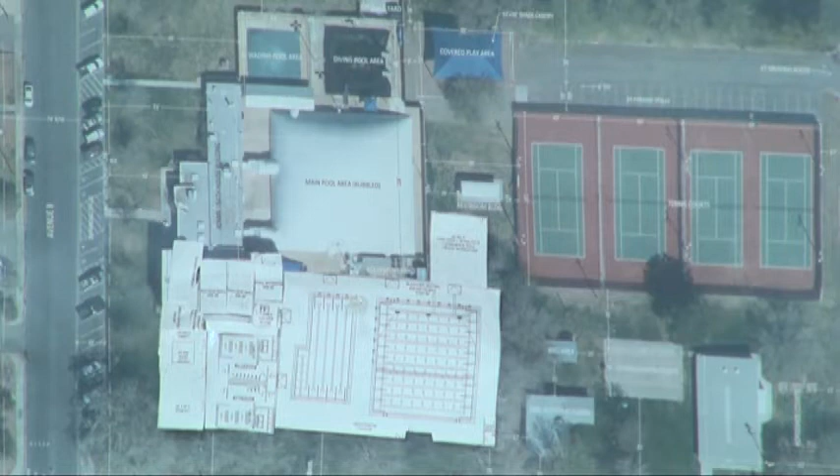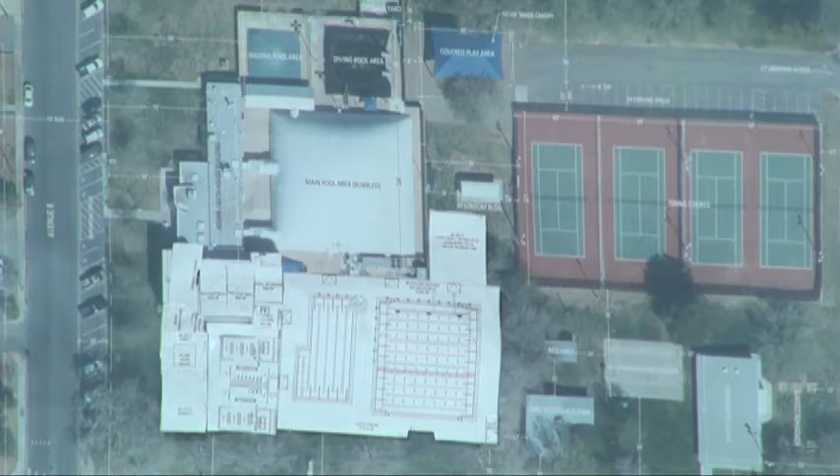Well, again, the difference also is that you've only included the things that we had determined were a necessity right now, and things like a larger weight room would be future and might then occupy the existing pool area later on. Correct, and like a small fitness center, similar to what they already have. I kind of listed it right there as that back racquetball area for now until expansion was done. But yeah, it definitely gives a lot more park on the north side. Any other questions or comments? Okay, thank you for the work on that.

And Mr. Cohen, this is not exactly on topic, but you had been in touch with someone who might be able to come and take a look at the pool and do so for free and give an opinion.

Okay, there we go. Yes, I contacted PoolServe. They handle all of the MGM properties, and they are willing to come out, no charge, and let us know the cost between fixing the pool and installing a new pool. Not for the rest of the facilities, but just what the pool and everything that pertains to the pool's maintenance would cost. And then that way we can see if what we're being recommended is correct or if it is high or low on what they would say.

And I have all the information that I can give to Keegan so that he can reach out to them. And again, especially when it's free, and I appreciate you making that contact. Too many cooks might spoil the soup, but I think if we can get opinions from folks that do this, and especially on the large scale, the MGM hotels, it would be helpful. So I appreciate you getting that information. Okay. Anything else on this item then regarding design features and elements?

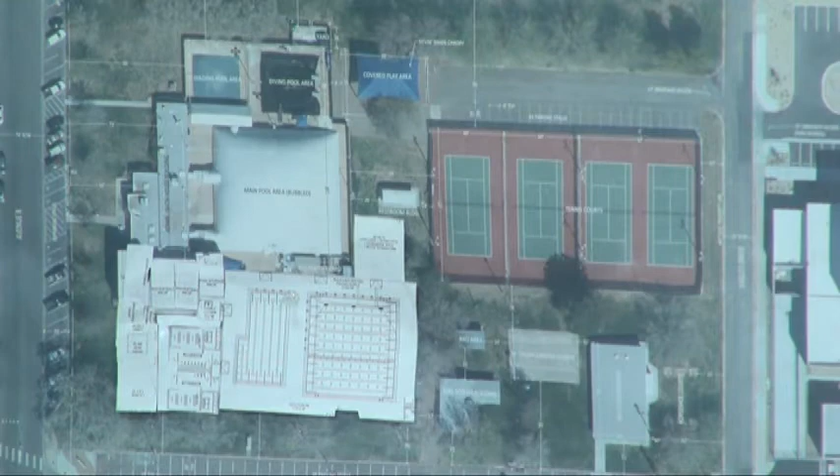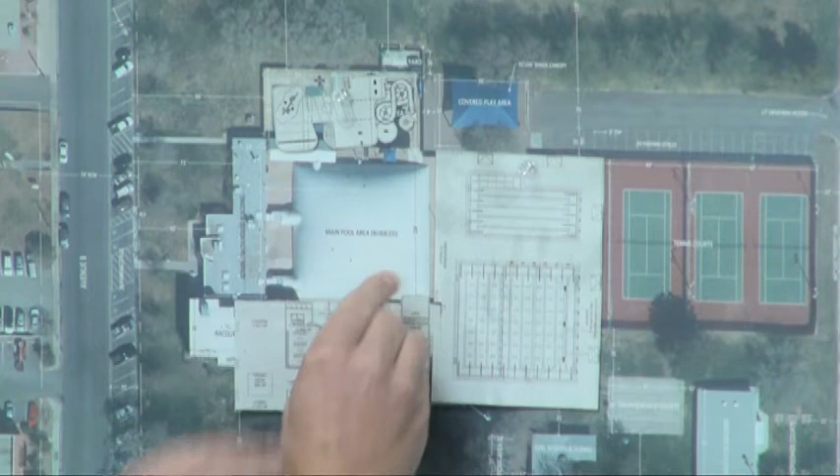And again, right now, it does appear that if we look at the design that Mr. Anderson did, we saved virtually everything there. If we look at the upper one that we had been looking at, we do lose a tennis court, but the other structures in the park remain. Yeah, all except there's a bathroom in between the tennis courts and the pool that was built in the 1960s that's fallen apart. We'd probably knock that down. And again, I think what we had talked about is with the new pool facility there would be restrooms available to replace that.

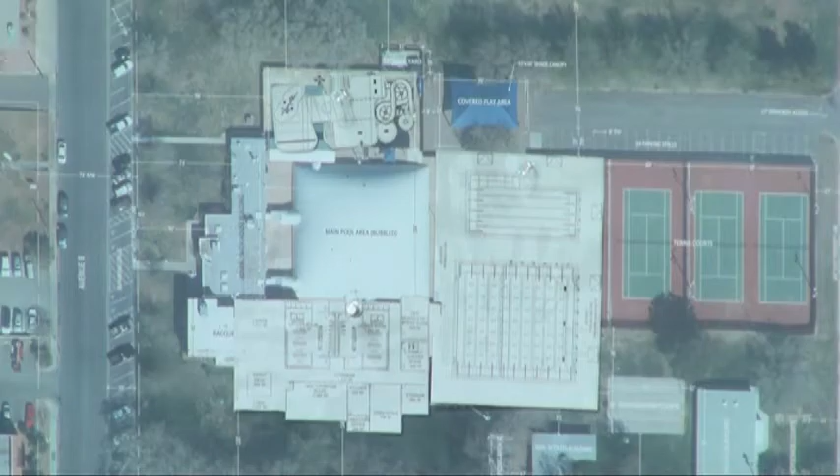Okay, any other questions or comments? How about if we save $2 million or so on no gym and no racquetball court, maybe we ought to add a sauna. Getting into the horse trading now? Let's make this thing comfy.

All right, we will then move on to item number 3, discussion and possible recommendation regarding the continuation of the Municipal Ad Hoc Pool Committee. What has happened here is, of course, we lost many months because of the pandemic, and the idea was that this committee would expire by the end of the year after having made its recommendations to the City Council. So we're at that point. I think the committee needs to stay together, I would say at least until March of next year. That would give us roughly another 5 or 6 meetings. Anyone have any other thoughts on that?

I think you're right. I think it's been about 6 months that the committee hasn't been meeting, so I just wanted to make up for those 5 or 6 months that we weren't able to meet because of the virus restrictions. So I think that might be helpful to get somewhere so we have something to give to the public. For those of us who are passionate about it, we'd like to work on it more. I think there are a lot of good ideas in this group, and I'd like to see it continue, at least extended to make up for the time lost.